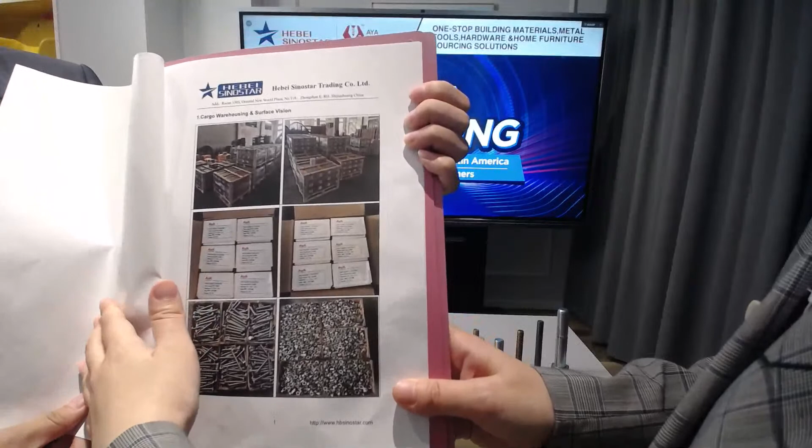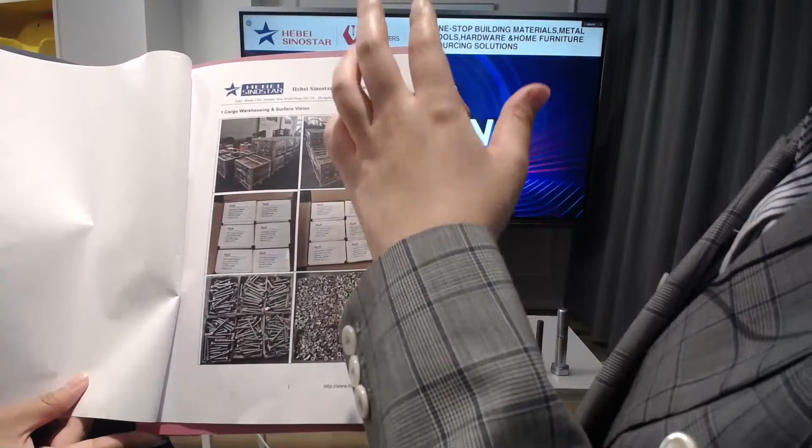Now let's begin with the first part. The first part of the inspection report is the cargo warehousing and surface vision pictures. Our QC will put all the cargo pictures here, like the finished packing pictures to show our customer the warehousing, and then we open the carton and inner boxes to show the inner cargo surface vision pictures.

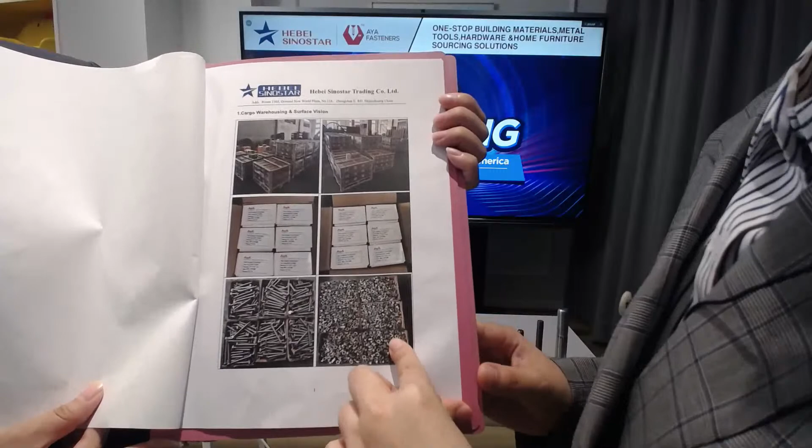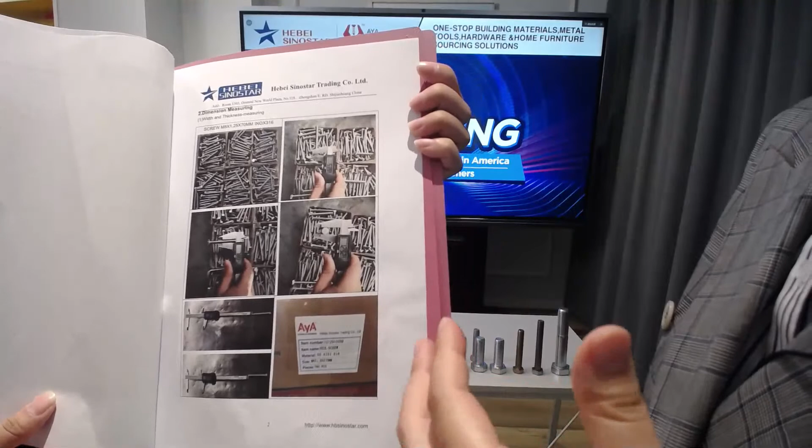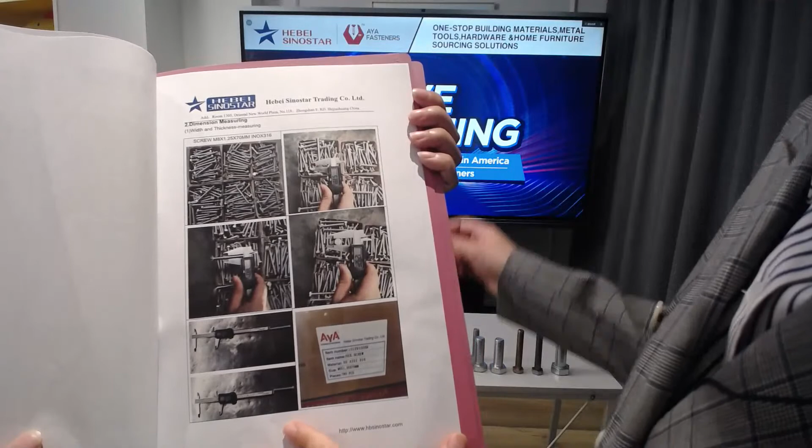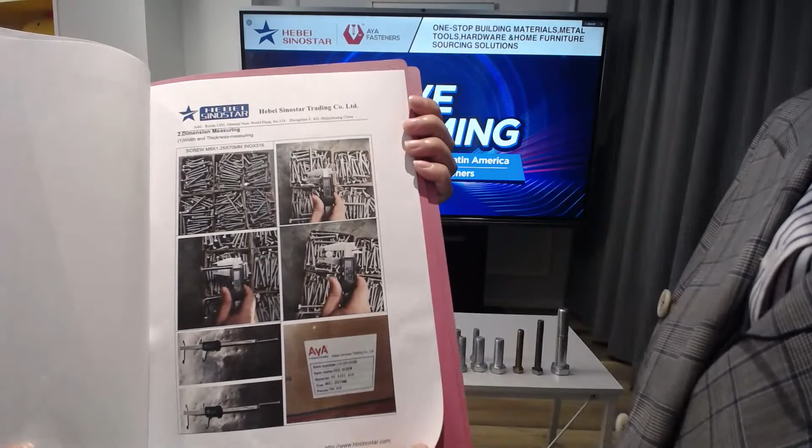Now let's introduce the second part, our dimension measure pictures. On this part, our QC will put all items for this contract with all size and test pictures to show our customer. The first page of the second part is the hex screw, size 8 by 1.25 thread pitch, length 70 millimeters, material 316 stainless.

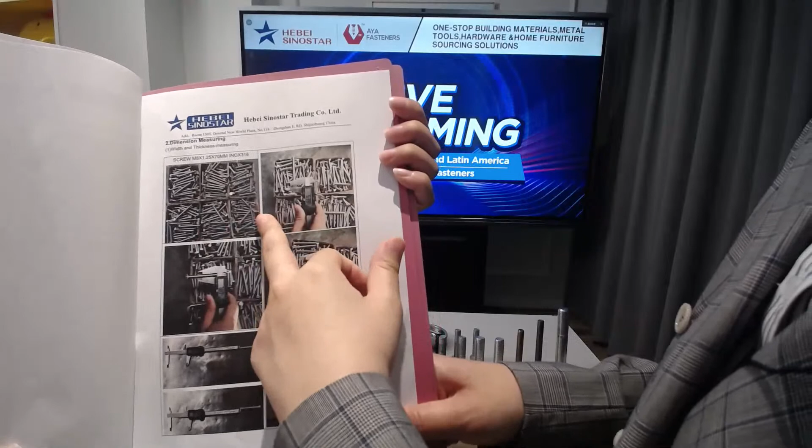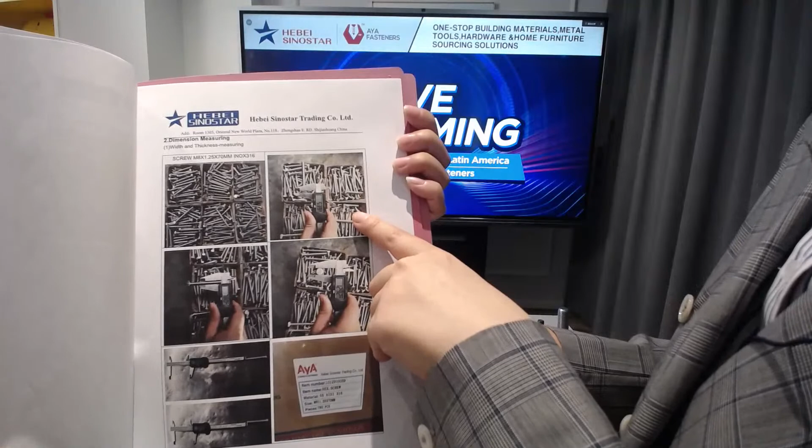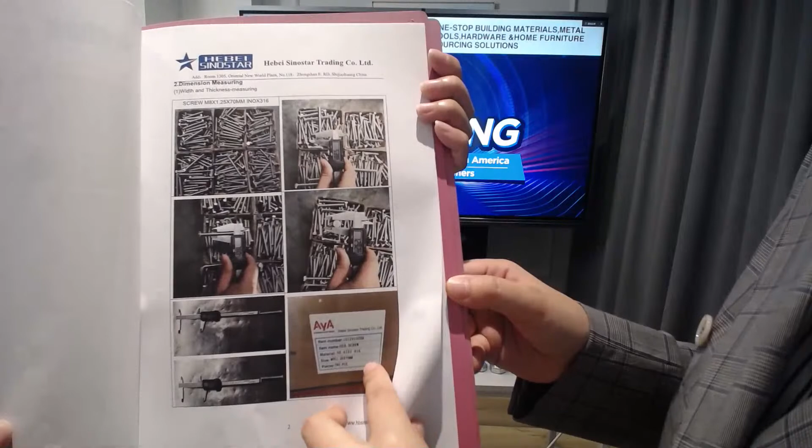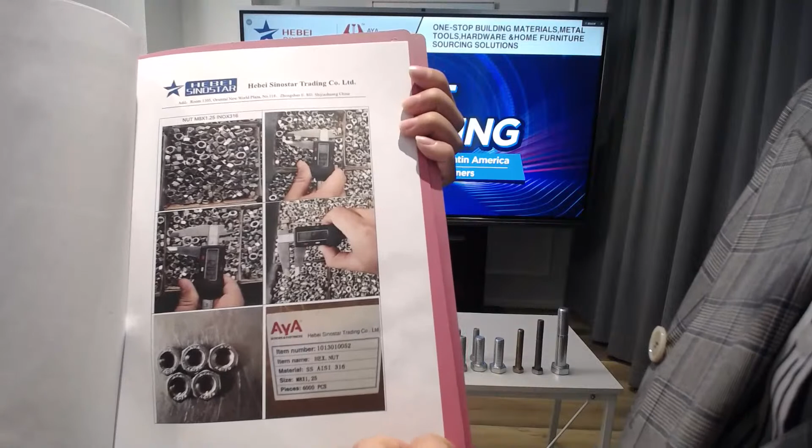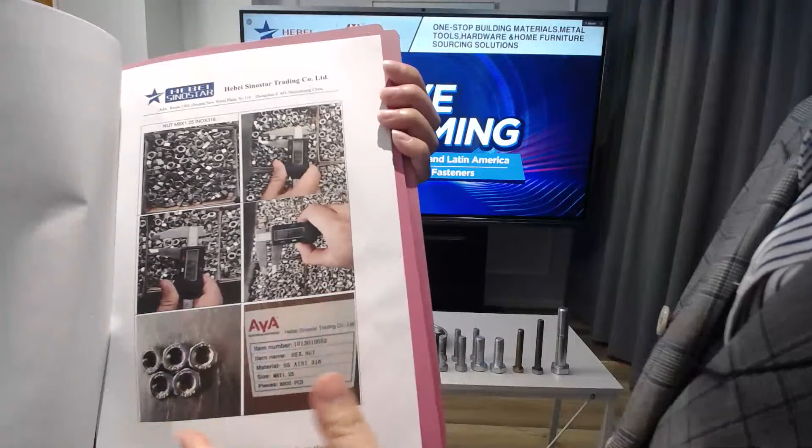Here are the boxes and labels. Next page, we see the test pictures of the nuts. For the nuts, the size is also thread pitch 1.25, material stainless 316. The first page shows opening the boxes to check the inner surface vision pictures, then the test picture of thickness of the nuts.

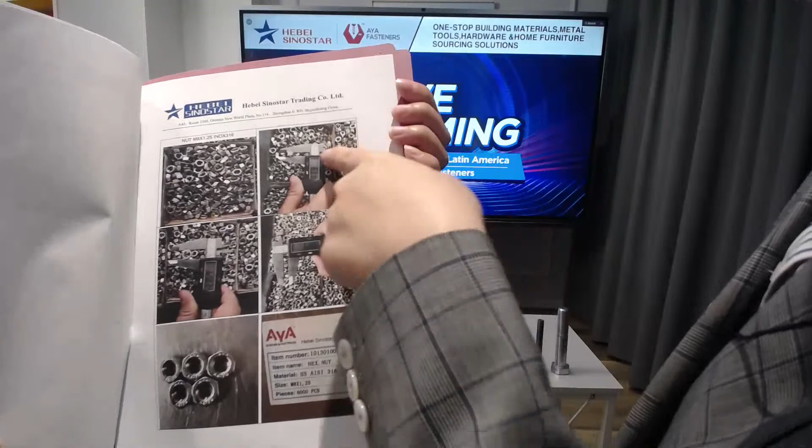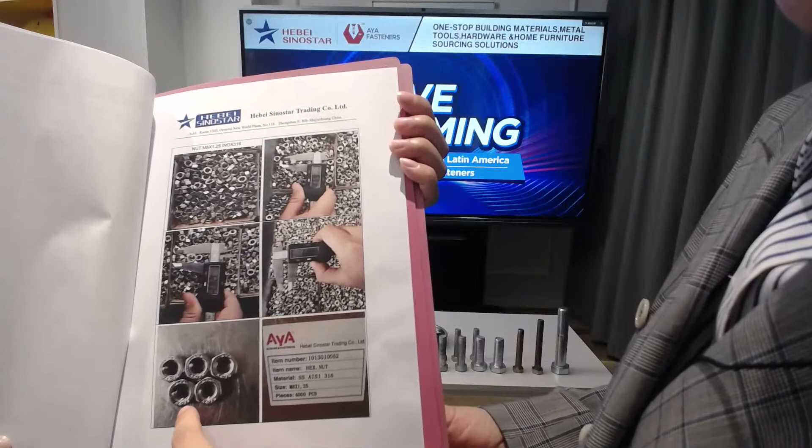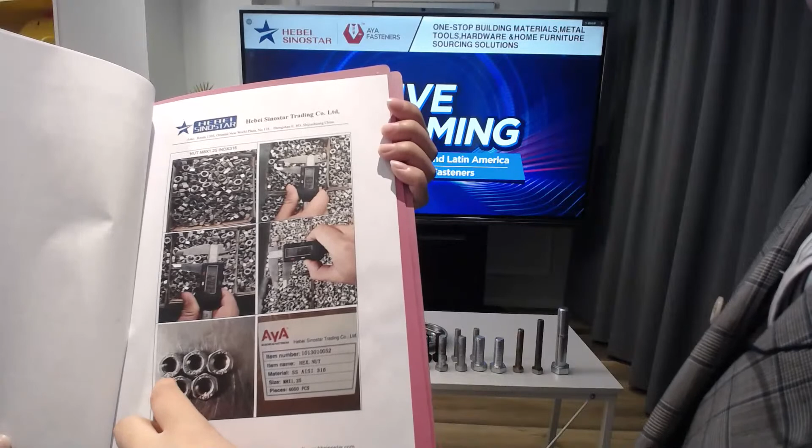This is the cross width of the nuts, this is the inner diameter, and here are the mark labels. We can see here A4-70 — this is the short name for stainless 316, and the grade is 70. Also AYA is our company's brand and label. This picture shows the labels of the inner box and the outside of the carton.

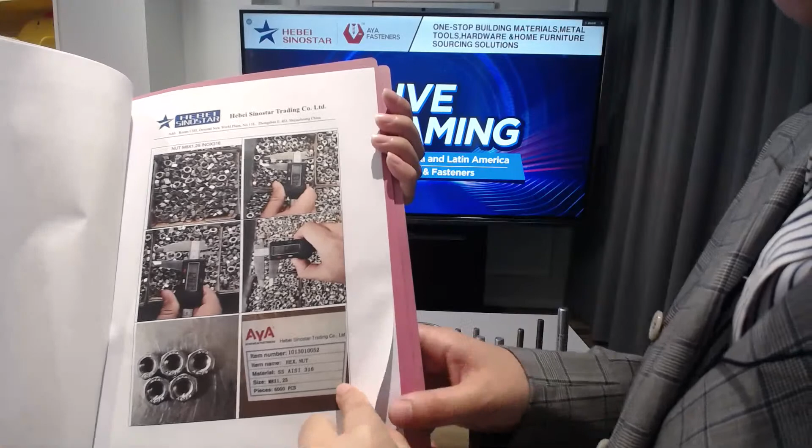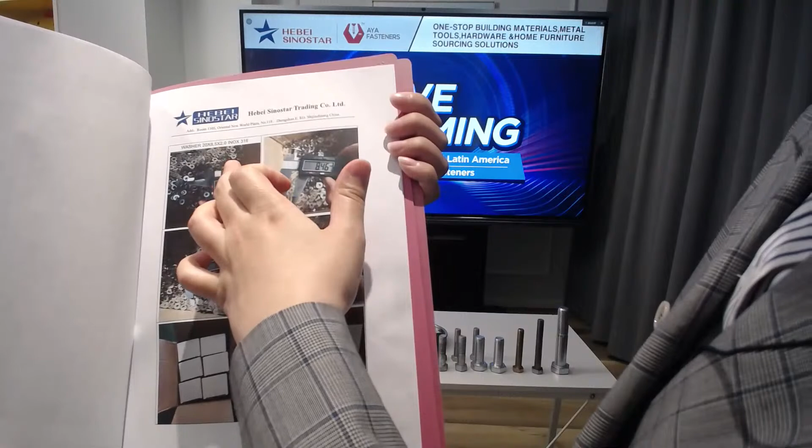Next product in this inspection report is the washers, and the washer size is different — 20 by 8.5, thickness 2 millimeters, material also stainless 316.

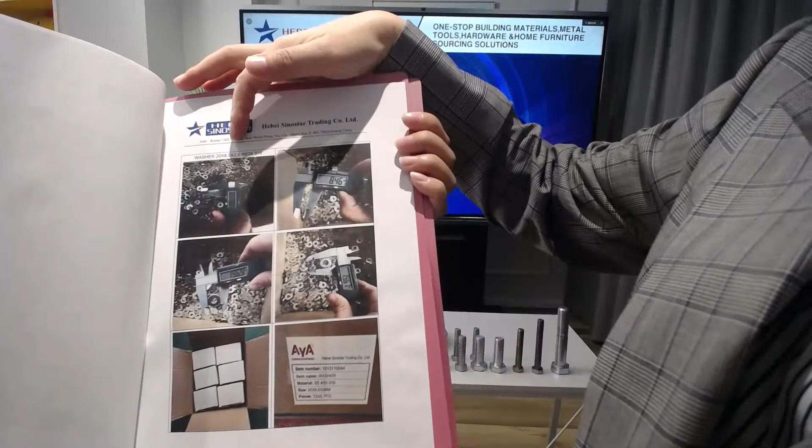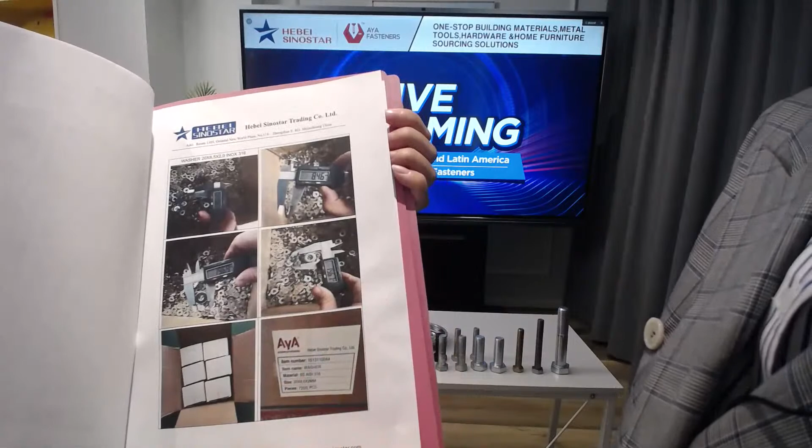We can see the test pictures here. The first picture is the thickness of the washers, then the inner diameter test picture, and outside diameter. This is also the outside diameter, and here is opening the carton — we can see 6 boxes in the cartons, and these are the label pictures. That's the complete information of the second part, which mainly introduces the test pictures on all sides.

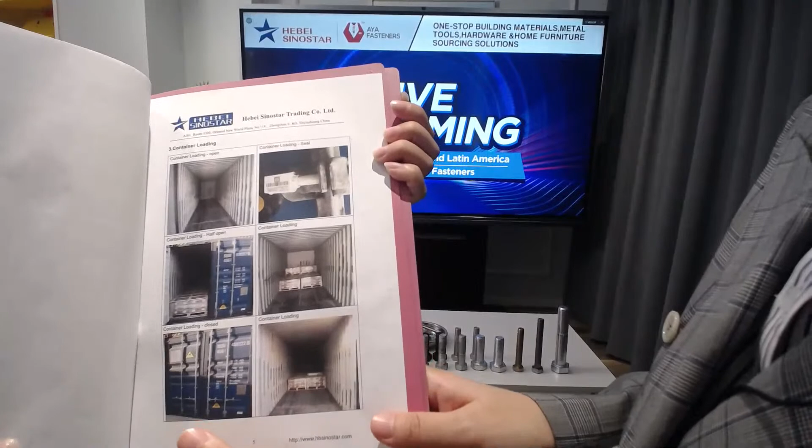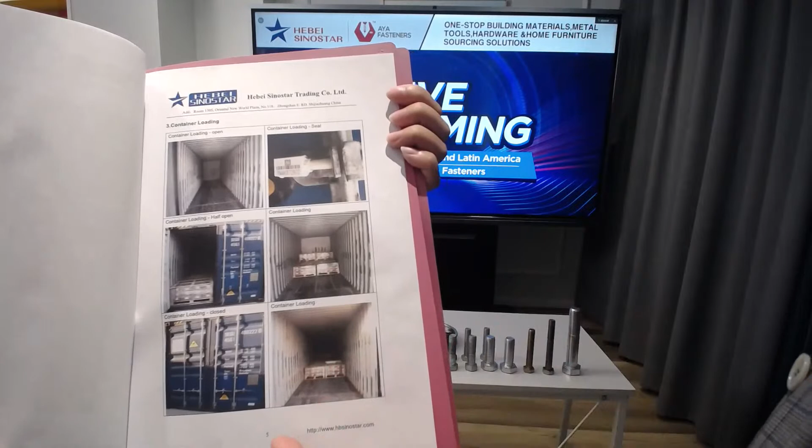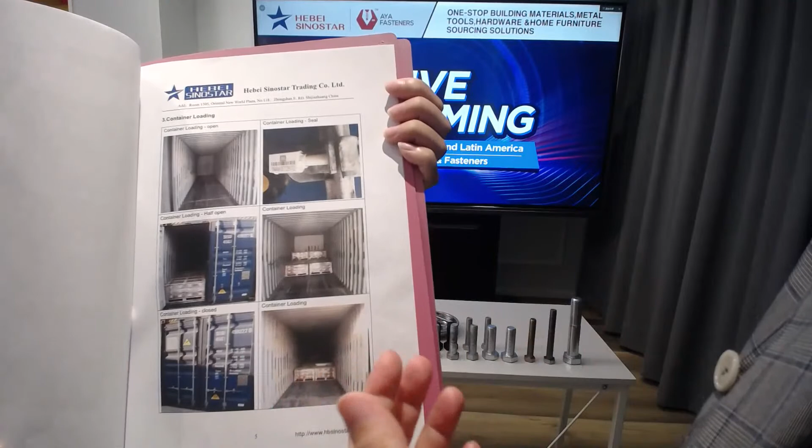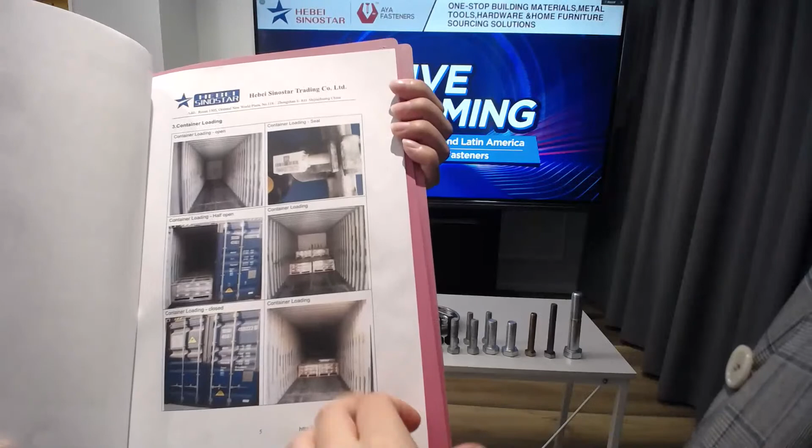Now let's introduce the next part. The third part is our container loading pictures. Our QC will put the loading pictures here. Before loading the container, we inspect the container situation to check for any internal damage problems, and if there's no problem, we arrange to load the containers. The first picture is opening the container to test the inner container situation, and also the loading process and middle loading process.

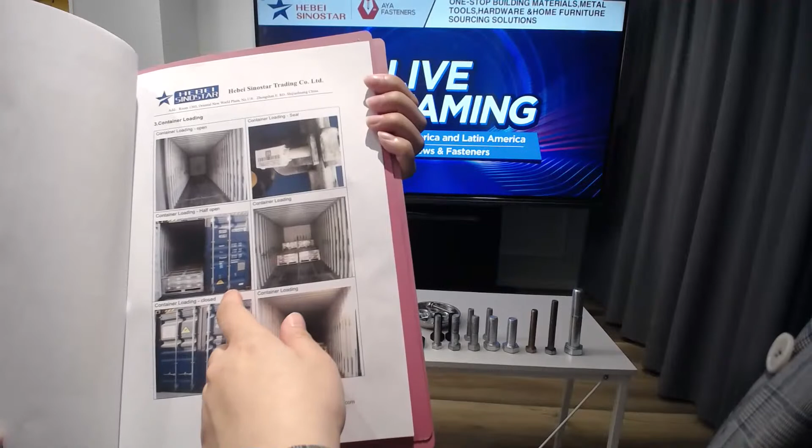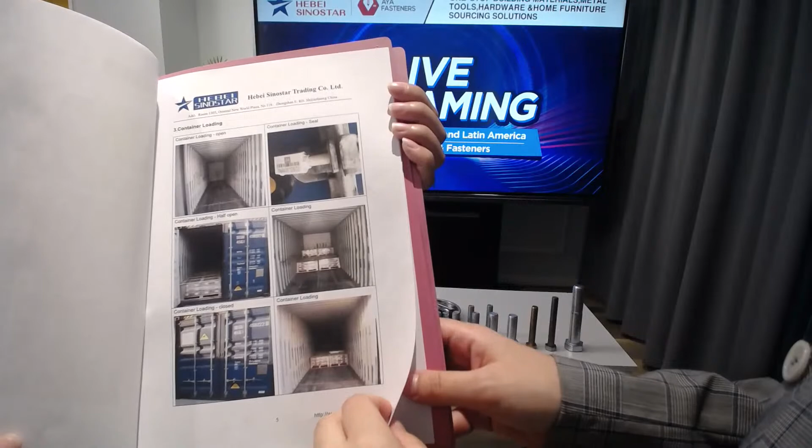We can also see the picture after finishing the loading — we take the half-open and closed pictures to show our customer, as well as the seal number pictures so our customer knows more about our loading container situation. Okay, that's the third part.

Rita, I think from this introduction our customers will know more about our inspection report, and it will also be more relaxing for them regarding cargo quality. Yeah, I think my customers will like this inspection report, it's very helpful. Yes, and it can also help our customers save on inspection charges.